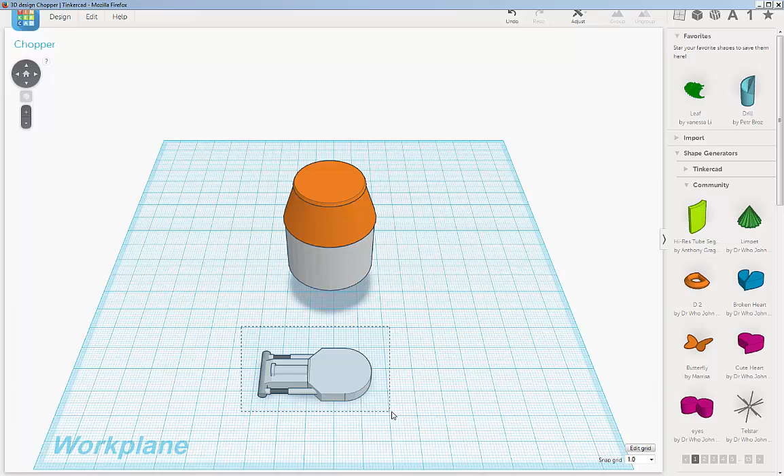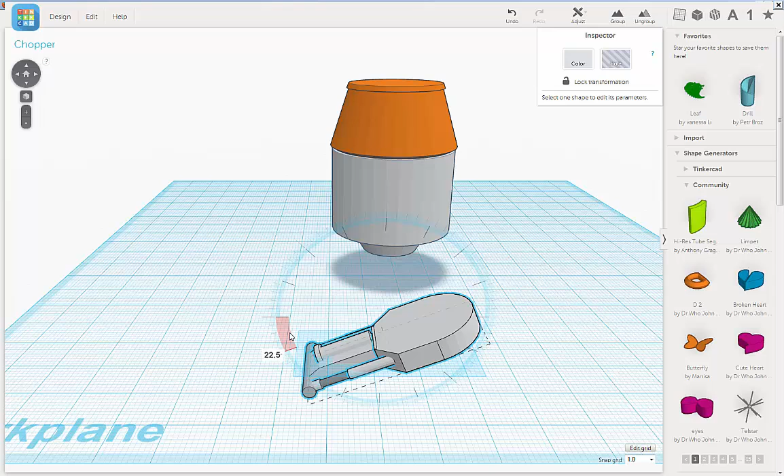Now I'm going to stand it up, rotate it, and we're going to lay down his foot. First we'll rotate it up 90 degrees. So you're going to select the rotation tool, and you're going to stay on the inside dial.

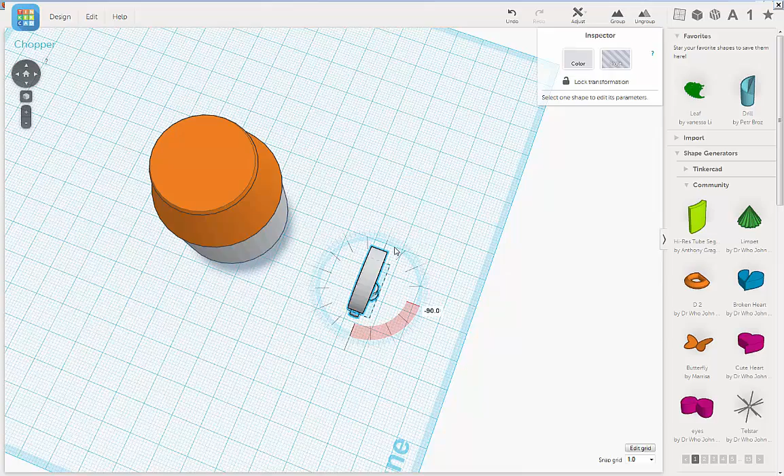And it clicks to 90 degrees. Now we need to rotate it again. I'm going to rotate it again 90 degrees. There. And we're going to move it up.

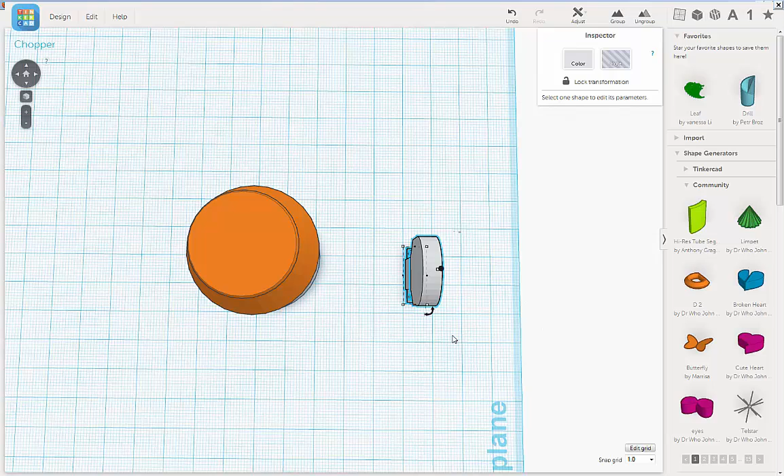Looking at it from the top, I'm going to use the left arrow key, and I'm going to move it over to the side of Chopper's body.

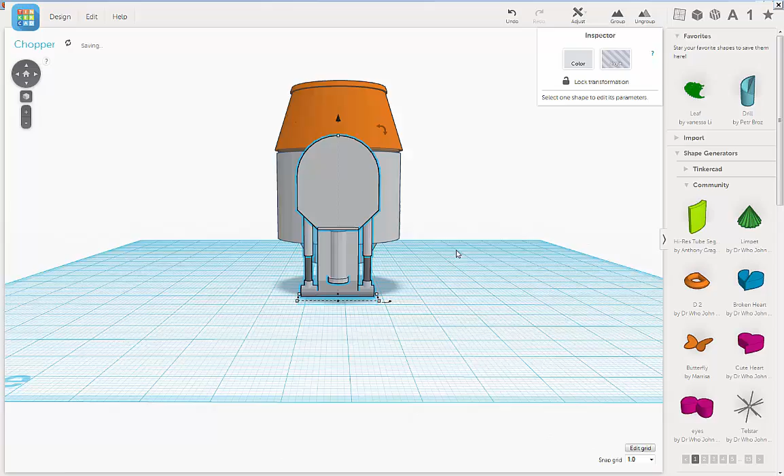Okay, now from this side, I'm going to use the right arrow key and align it that way.

Getting there. It's a little too big right now, but that's okay. We're going to put the whole leg together, and then we'll scale it to fit his body.

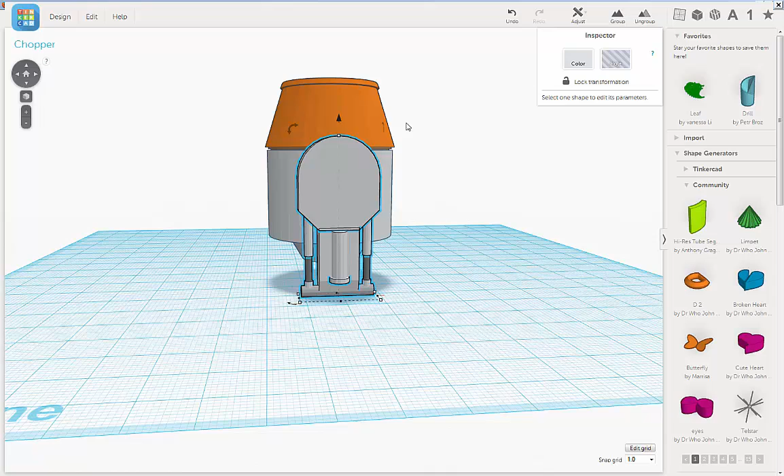So now we need to make room for his foot. So I'll lift this up. Now, don't worry about it fitting for his body right now. Just want to make space for his foot.

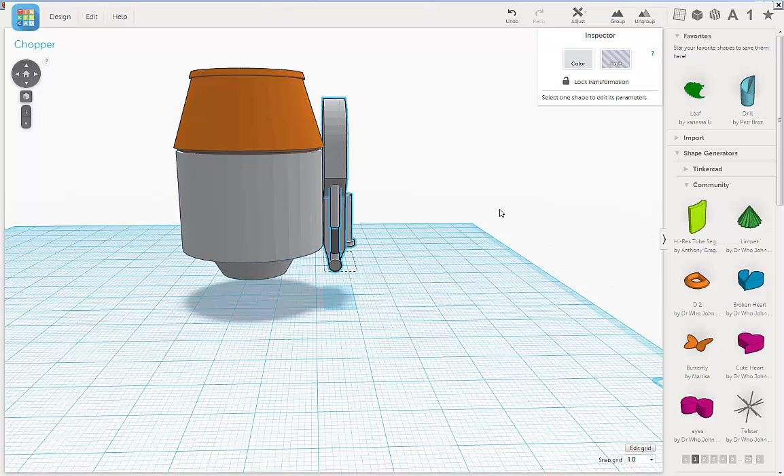Good. So now that we have it aligned, I'm going to actually bump it out to have some room to move around.

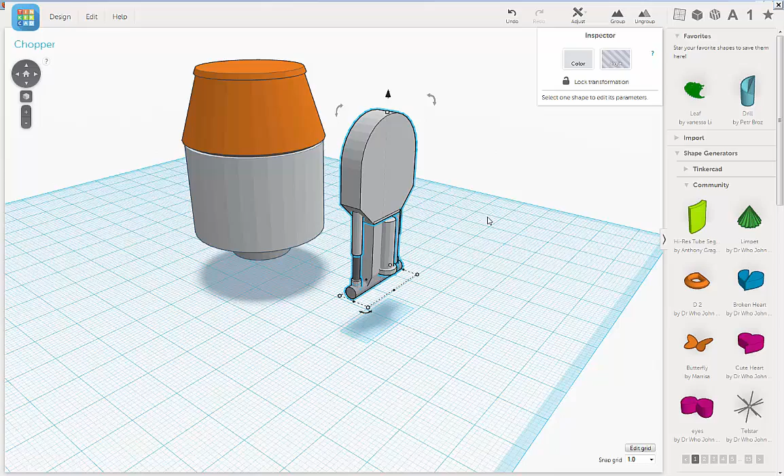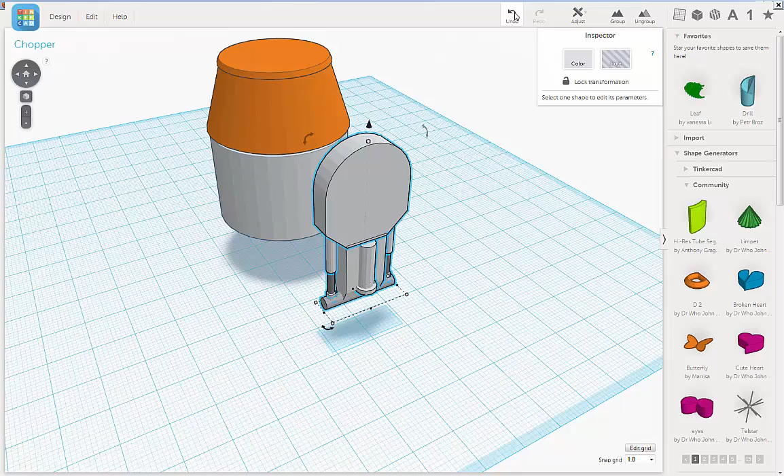In case you didn't know, one of the great things about Tinkercad is it automatically saves all the time. So if you're worried about crashing, which is when the software just stops working for no particular reason, Tinkercad is constantly saving. So say we rotate it like this, and we select it, and we just move it. See up in the left hand corner, it says saved, all changes saved. That's great because it allows you to focus on what you're trying to do and not worry about the technical stuff. So I'm going to undo that move, and see, it saved it.

And now we are going to find his foot. So his foot, if you have your reference, it's basically a cube that tapers at the top.

So we're going to look at the Tinkercad community shape generators. Shape generator community, that isn't down, just click on it. I'm going to scroll down, and we're going to look through. There might be a tool in here that we can use.

It's all these shapes, most of them have controls on them to make changes, which makes things a little faster when you're trying to come up with a certain shape. That's why if I have something in mind, I'll look through here first. And it's kind of cool, some neat stuff in here.

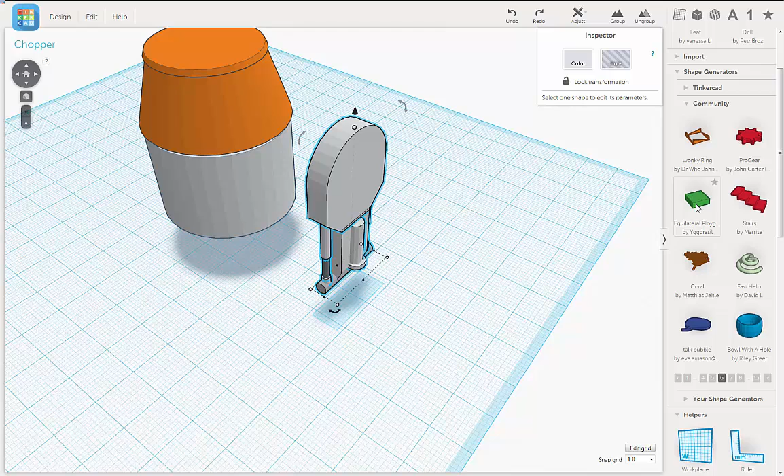So sometimes you have to experiment. I'm not sure what it does. This is kind of interesting, let's just see what this does. So just, oh okay, it comes out at an angle. Not quite what I want. So let's keep going.

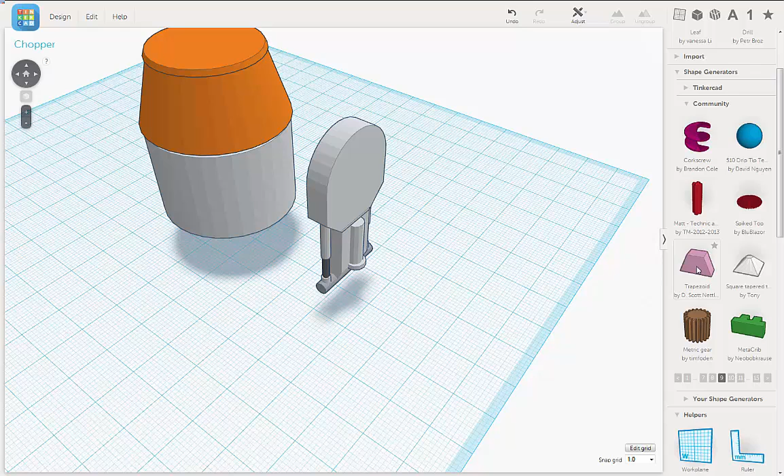There we go, trapezoid. It's exactly what we want. And it has controls on it. That's great.

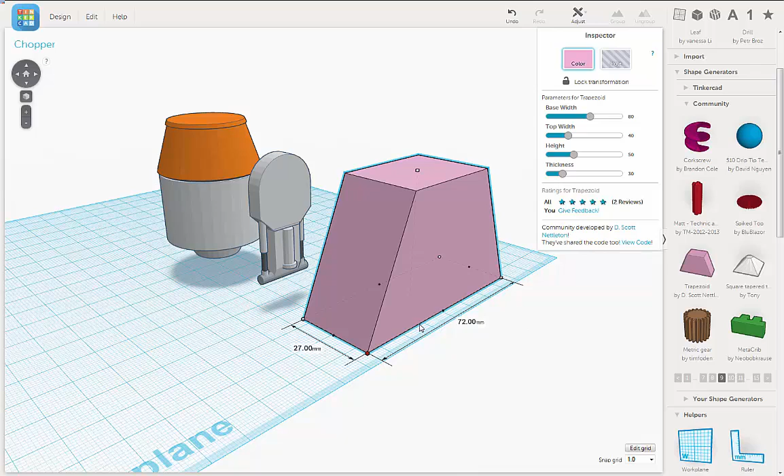Alright, so let's shrink this down. So I'm going to click the corner control point, hold the shift button down with my left mouse button, and oops. So let's just go down, trying to look for an even number. 24 is good for now.

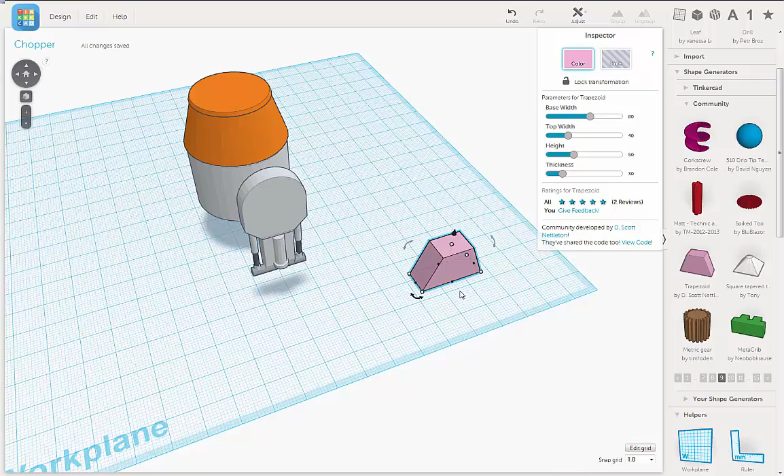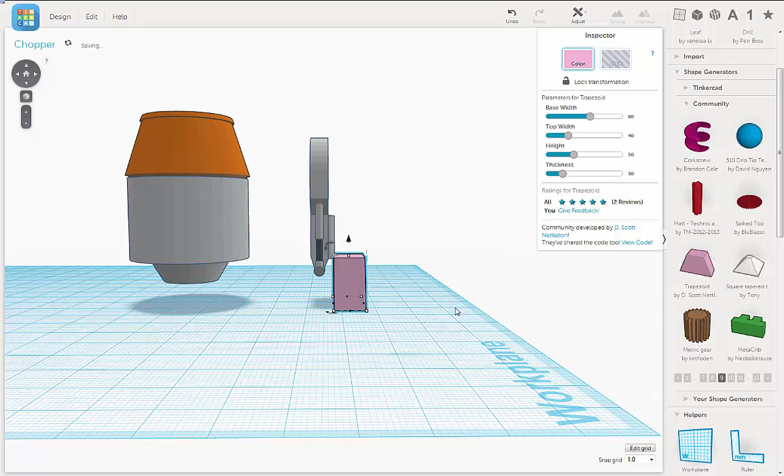Alright, and then let's get it into position. So I'm going to face the trapezoid, and I'm going to use my left arrow button to move it into position. I'm going to rotate and face it from the front, and do the same thing, use the left arrow key.

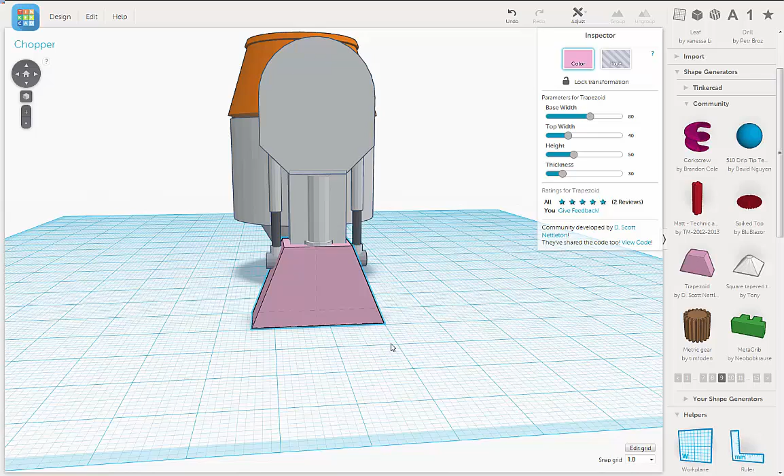Alright, so now it's a little big, it's a little tall. So let's move that down. I'm going to try and use these controls because you can have a little more control with the height. You can either slide it here or you can just type it in. So let's try.

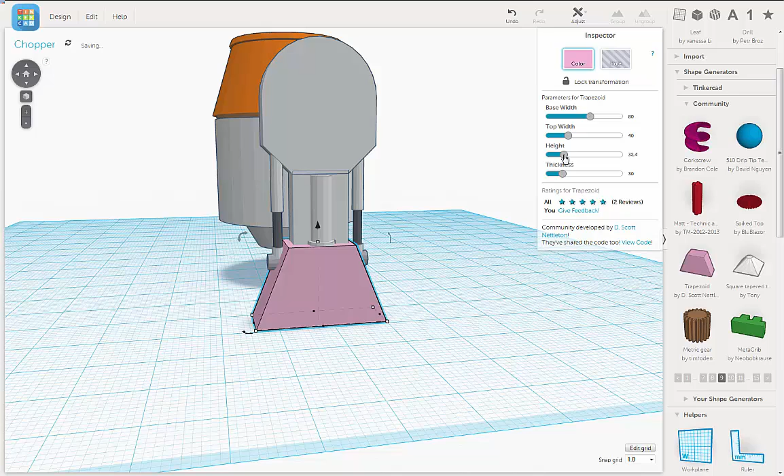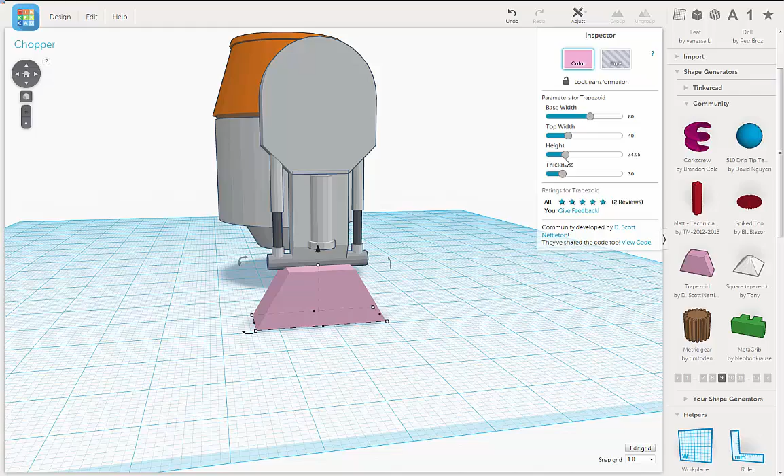By sliding it, I'll use it to get a rough idea. And we want that to be just, the cylinder is just on top.

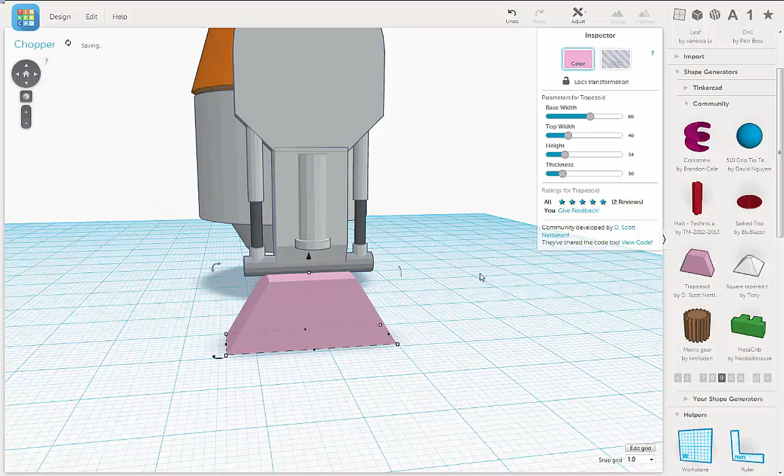That's pretty good, so that's 34.1. Let's just turn it into a 34. I'm gonna use the arrow key and just kind of align it a little more. We want this cylinder to be basically in the center.

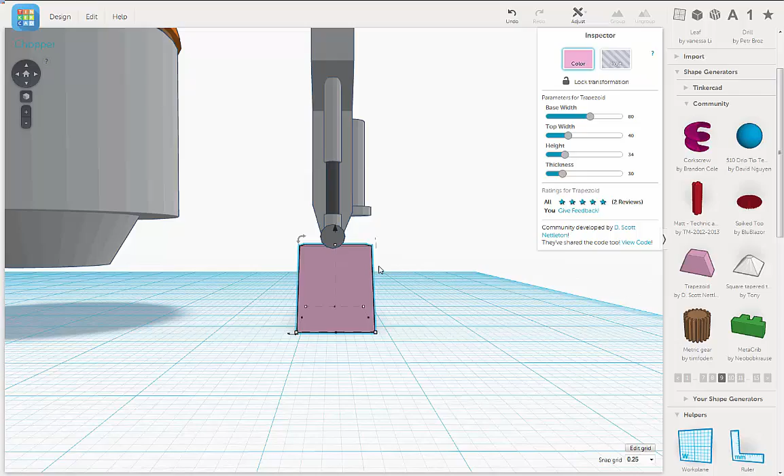The snap grid is at 1 millimeter, so let's switch it to 0.5 and do the same thing using the right arrow key. Almost. Go to 0.25 and let's do it again using the left arrow key. There we go. Then you keep everything lined up and exact, makes your life a little easier.

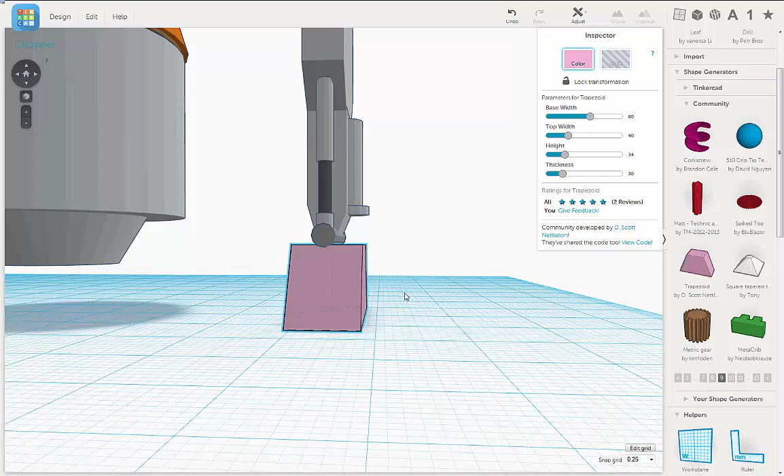Alright, so that's pretty good. Now there's a lip, a square lip that runs along the edge here, around his foot. So let's see, what is his foot?

If you want to get the measurements, you put the arrow over one of these control points. So he's 9 millimeters wide by 24 millimeters long. This really makes it a lot easier.

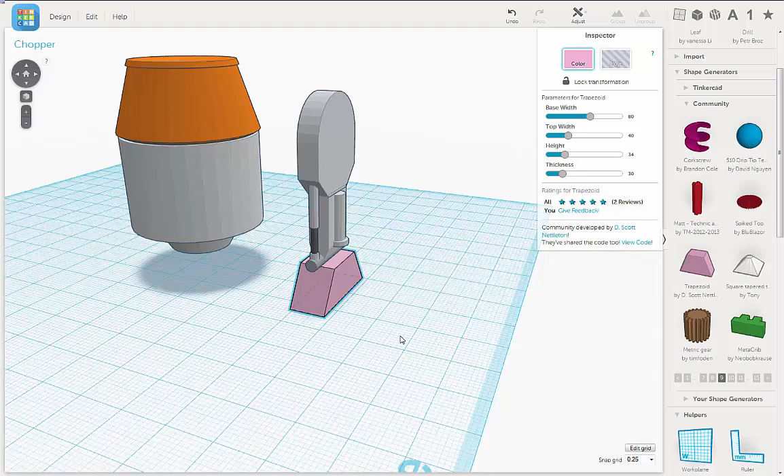So we are going to duplicate this. We go to Edit, Duplicate, and we're going to make the top width the same as the base width. So that's going to make that a cube.

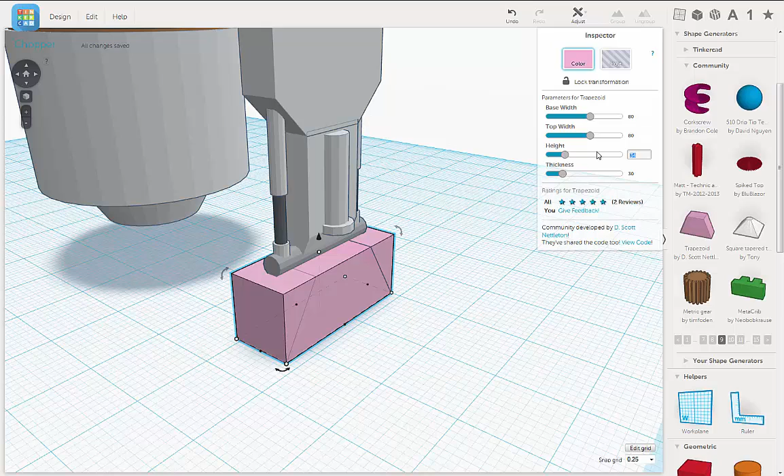See? Then I'm going to take the height, move it down to, let's try 1. Alright, that's a little thin. Let's try 2.

Okay, and then I'm going to make the base width, I'm going to move this out 1 millimeter on each side. So first we'll go to Snap Grid and turn it back to 1 millimeter.

And you'll select that point. Oh, see what I did? I didn't put it at 1, I put it at 0.1. So we'll go to Undo, and go back to Snap Grid. There we go, 1.

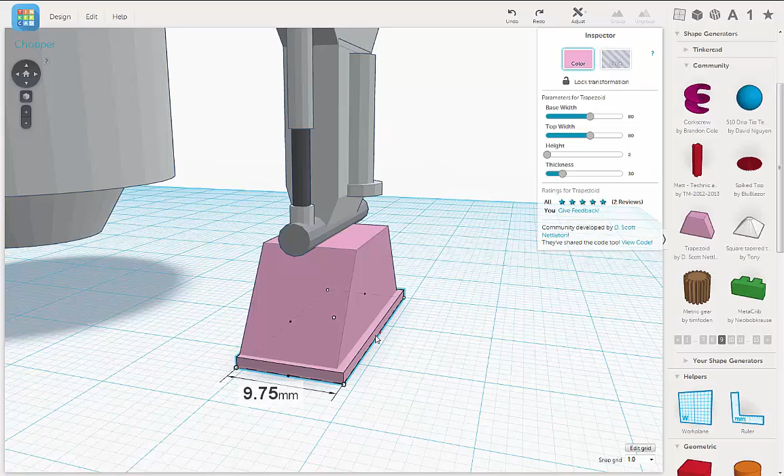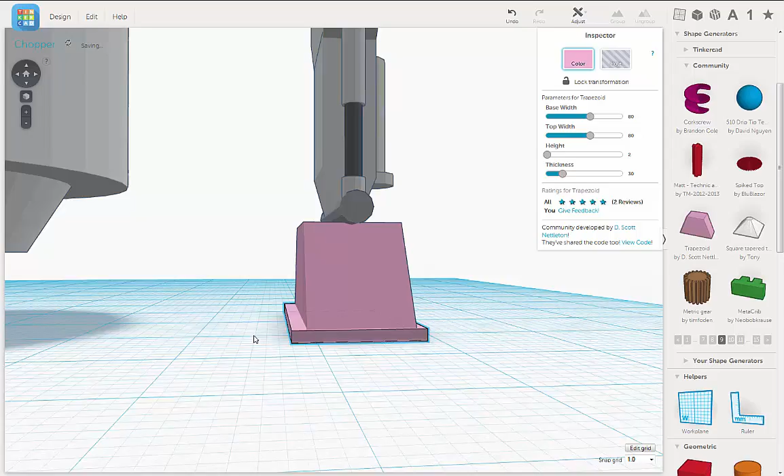Not sure why it's doing that. 9.75. Okay, that's a little weird. Sometimes software won't work exactly the way it's supposed to work. So what I'm going to do is go to Snap Grid, go to 0.25. Let's see if it does that. There we go.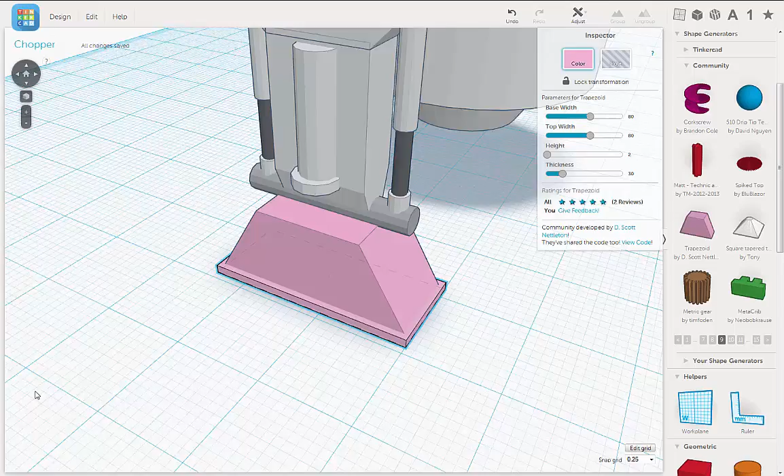And it's still too wide. I think we got to move it in a little more. There we go, 0.5. So we've got the lip around his foot.

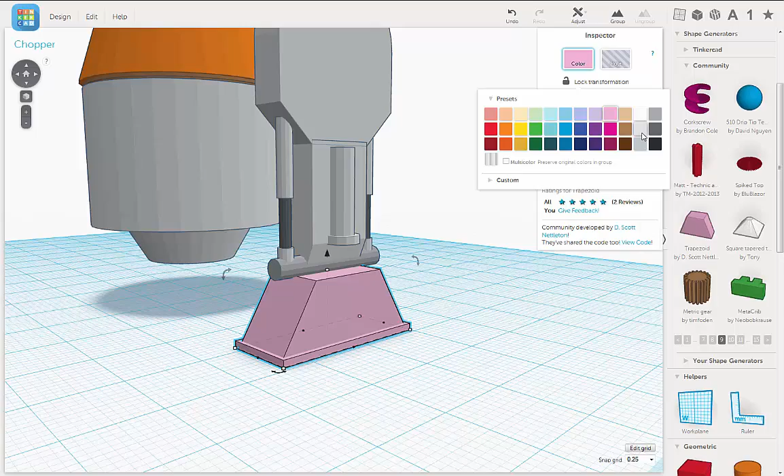This is the part where, when I have it blocked out for color reasons, I like to have it match. So I'm going to marquee select, go to color, let's switch it to the gray.

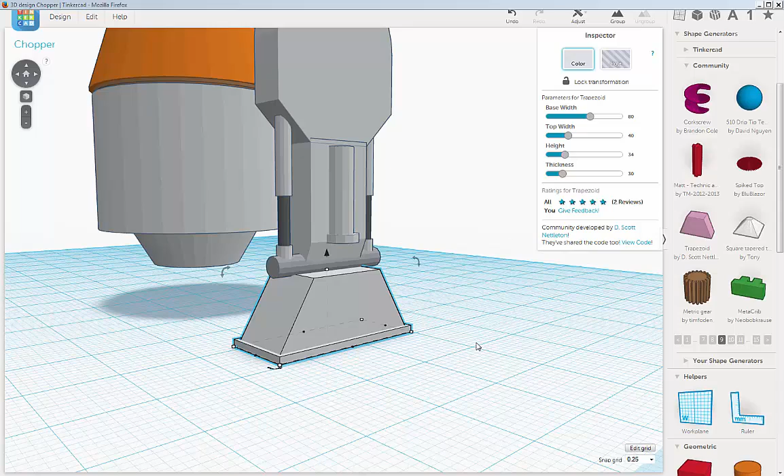Now this angle is too strong, it should be a little more like this. So we're going to, first I'm going to deselect, reselect, and we're going to do top width. Let's make that 40 and see what that gets us. That's better.

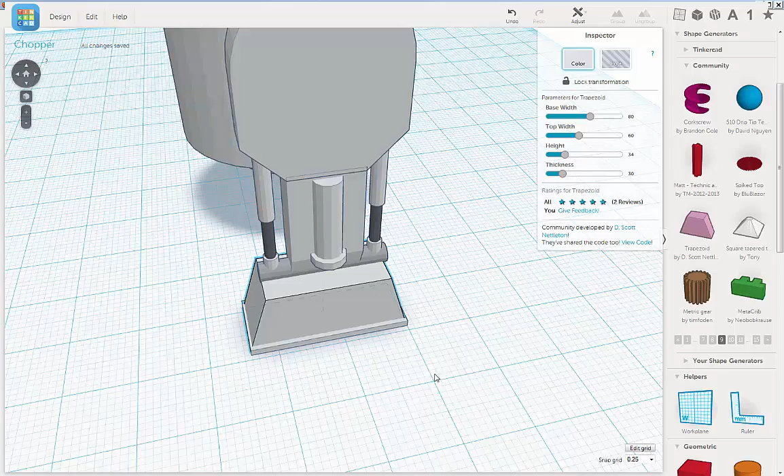I think I'm going to go up a little further. Let's try 60. Yeah, that's more like it. As you can see, it's affected the width here.

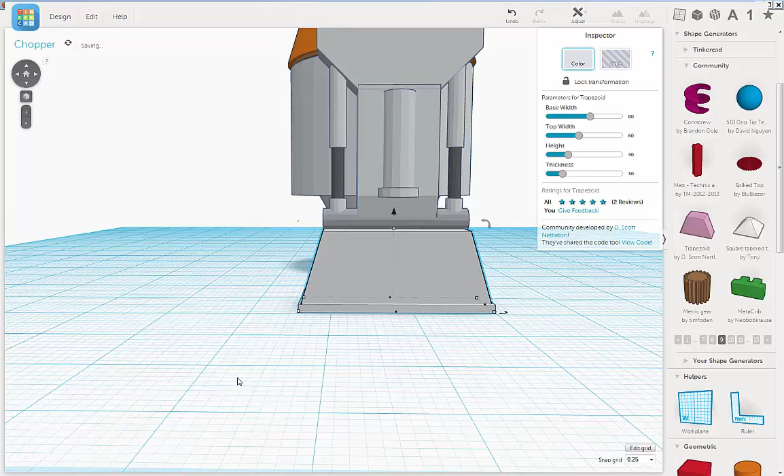So we need to fix that. But first, this is too short, so I'm going to select this again. I'm going to move the height up. Let's try 40. There. That looks about right.

Actually, probably go up to 45. Yeah, that feels pretty good.

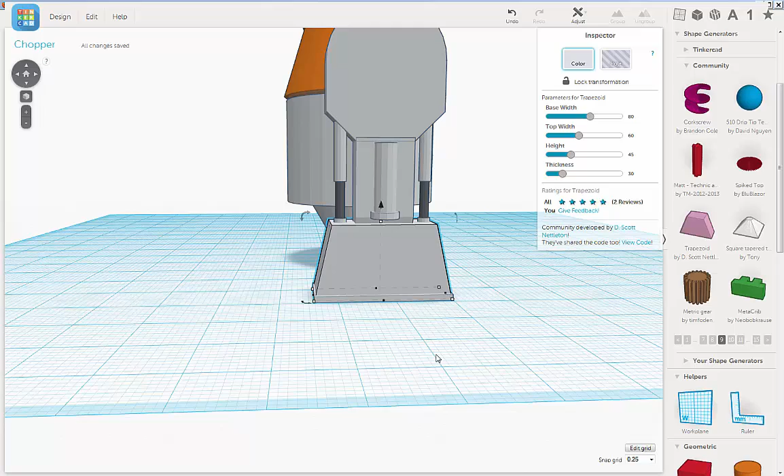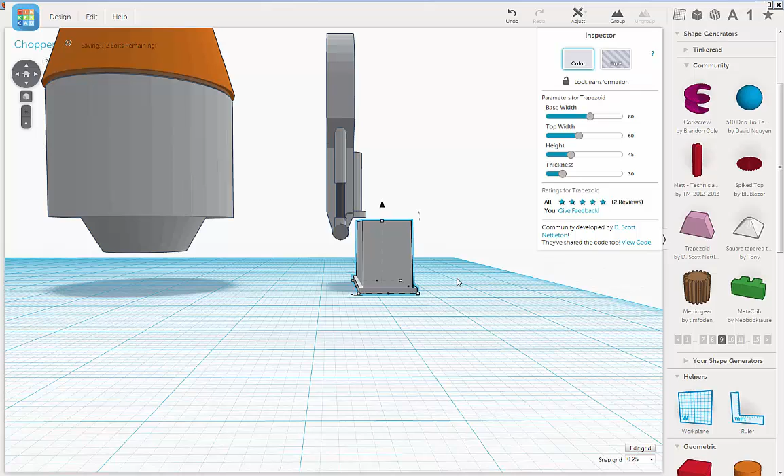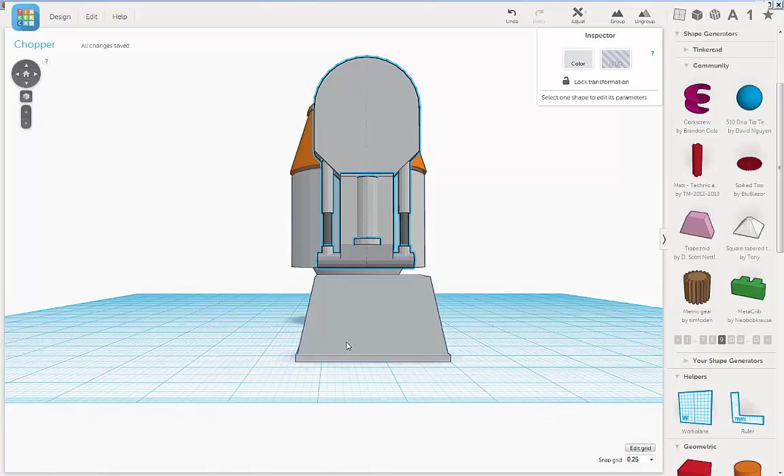Now I'm going to take his marquee selected 2 feet, and just so we have a little more room, I'm going to use the right arrow key and slide this over. And that's so I can marquee select this and move this up. So you have to use the up, this arrow button. Move that back.

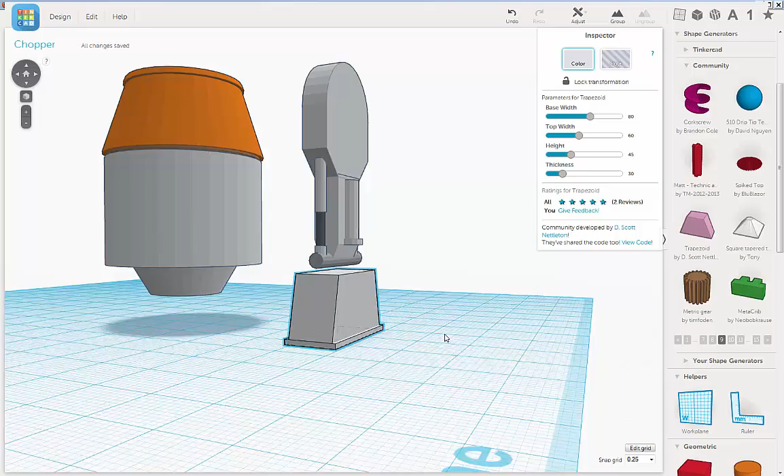It's okay if it isn't exact right now, just trying to get the proportions. Looks about right.

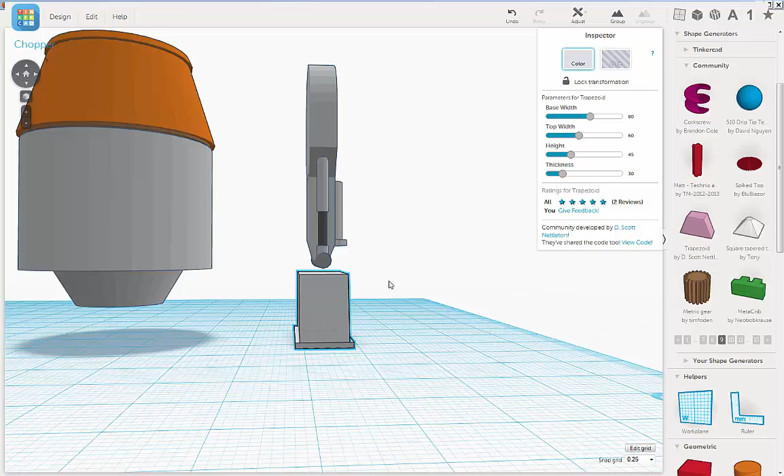I'll have to move these out a little bit. Oops, see, I have both selected. So go undo, select away, select this by itself.

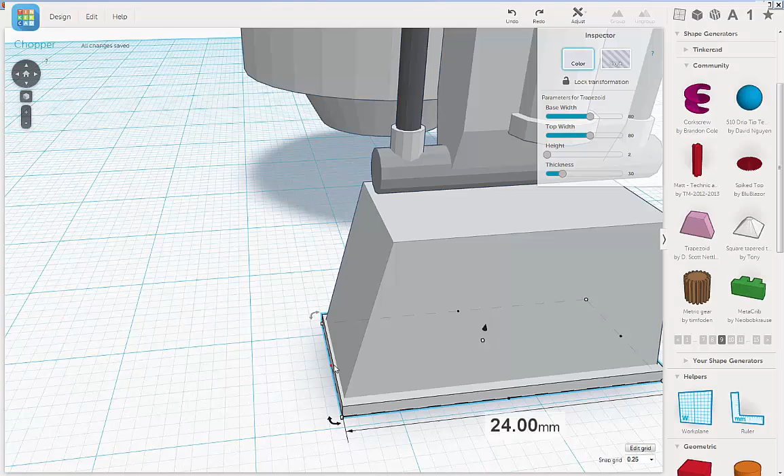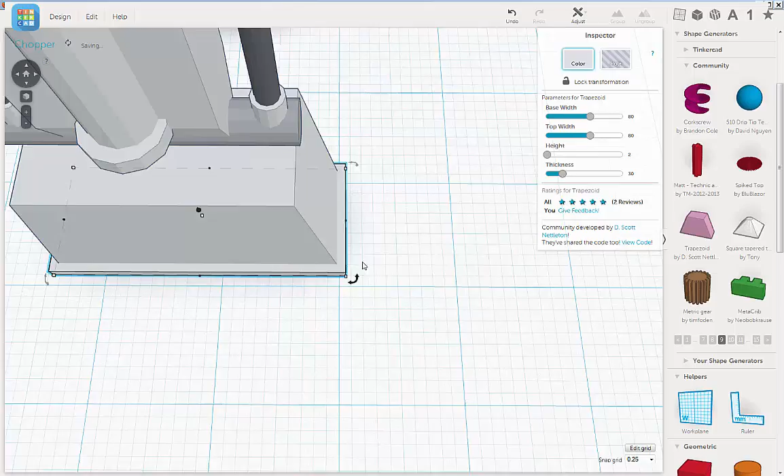Probably go a little further. There we go. Select here. There. Alright, looks about right.